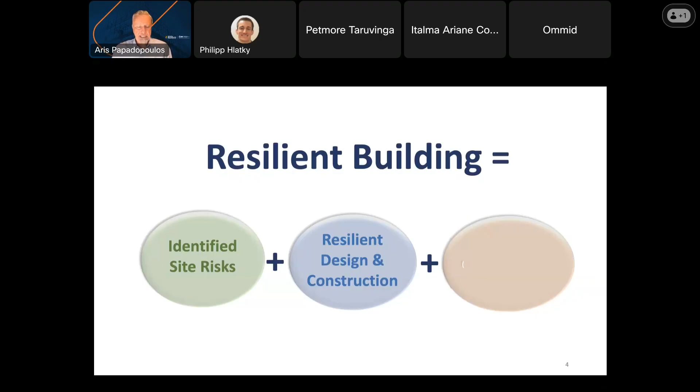What makes a building resilient? A building needs obviously to identify the risks that are applicable for its location. Second, to design and construct the resilient measures that are needed to address those risks. And third, as we know, a building is like a human body, it needs to be properly maintained, so diligent maintenance.

BRI focuses on the first two, the identification of the site risks and the design and construction of the building, rather than the third. But we do ask verifiers when they visit existing buildings to spot check whether there are any signs of deterioration and poor maintenance. And I will highlight some of those later in the presentation.

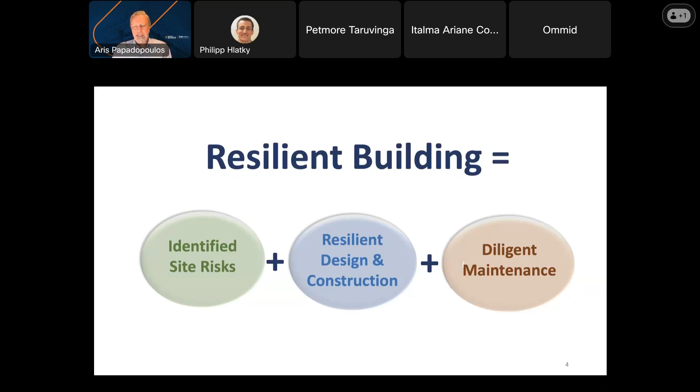So what is BRI in a short sentence here? BRI essentially is a verified self-assessment. The building is assessing itself, but that assessment is verified by two experienced and certified building professionals who are certified by IFC, and you are obviously all candidates for that. So the verification is the quality control for the self-assessment, and it is a rating. It is not a certification.

A rating for any building type. It can be a small building, a house, a large hospital, a school, government building, any type of building, warehouse. BRI is not for infrastructure such as streets, highways, dams, bridges, piers. In an airport, for example, you can rate the buildings, you cannot rate the runway. In a port, you cannot rate the piers, but you can rate the warehouses and the buildings.

And basically what we are rating are the hazard mitigation measures. We are not rating the hazards, we are rating the building's mitigation measures that it has to defend itself from those hazards. So this is a short sentence of what BRI is, and obviously we'll be discussing all the components of that.

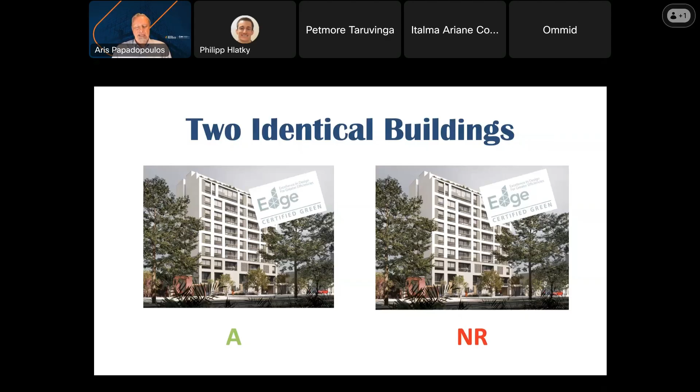I like to put this example up here of two identical buildings. They were identically designed and built, and in fact, they both rated very high on the green certification, a high EDGE rating. But when we looked at them from the BRI perspective, the one on the left turned out to be an A, and the one on the right turned out to be an NR. Two identical buildings. So, how is that possible? The one is an A and the other is an NR. And the answer to that is that we may have identical buildings, but they are in different locations.

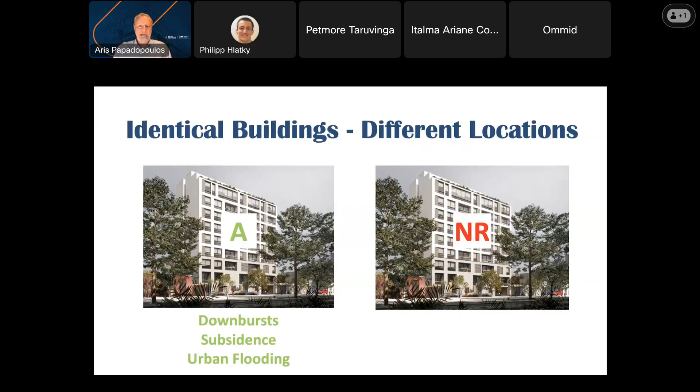The location on the left has relatively mild hazards of downburst, subsidence, and urban flooding that its design and construction has addressed. But if you use that same design and construction for a building that will experience typhoons, earthquakes, and flash flooding, that building will be subject to damage and perhaps destruction.

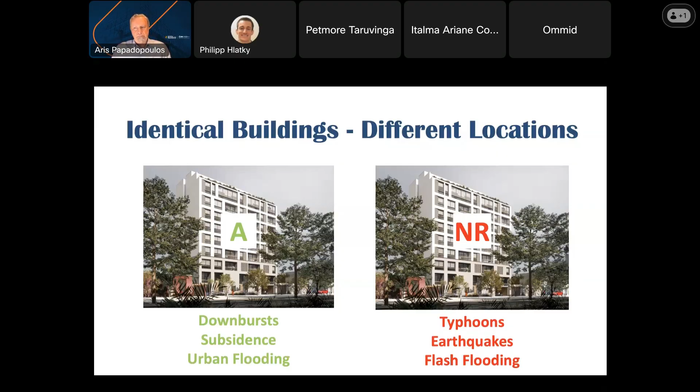So, BRI and resilience is very location specific, and the hazards of the location obviously affect the design and construction of the building, something that is not as pronounced in green ratings. So, that's what complicates resilience ratings to some extent.

So I also like to ask, who is the customer? And most people in the building professions and industry will say, well, the customer is the owner, or the developer, or the people who are leasing the building.

And I like to reply to that, true, but the customer is also nature, and nature is a much more demanding customer. And if nature is not satisfied, then nobody else will in the future be satisfied, because nature will take its toll on the building. So when you're talking to developers and owners and so forth, and they're pleading with you why they can't get a higher rating, keep in mind that your customer is also nature, and we need to satisfy nature, and BRI obviously is focused on that particular goal.

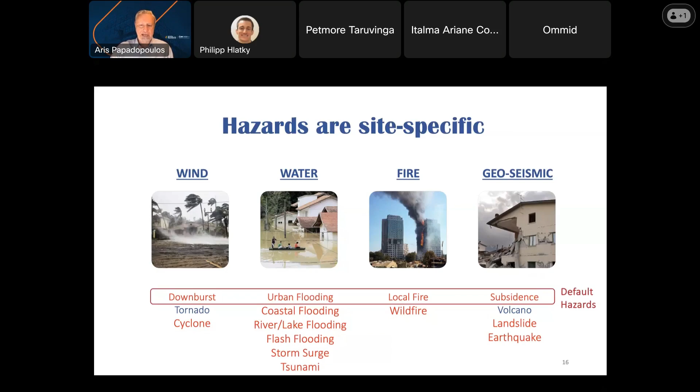So as I was saying, in the third part of the discussion today, our case example is from South Africa. I highlighted in red what I observe being the hazards in various parts of South Africa. As you can see, there are quite a few hazards, as you mentioned earlier. South Africa is affected by many hazards. So, definitely you'll see a lot of these in buildings that you are rating.

So as I mentioned, the BRI can be used for any building, new or existing. In fact, we encourage as much as possible for buildings to assess themselves in the design or even site selection phase. The rating at that point will be a preliminary rating, but it can help them address mitigation measures in a more practical and cost-effective way than after a building is constructed. It costs much more to change a building after it's built than to change the location or the design of the building before it's built.

So for buildings in design or construction, the BRI rating that will be done will be a tentative one, and then a final rating will be given following post-construction verification. So BRI can provide valuable input into the design and even site selection process.

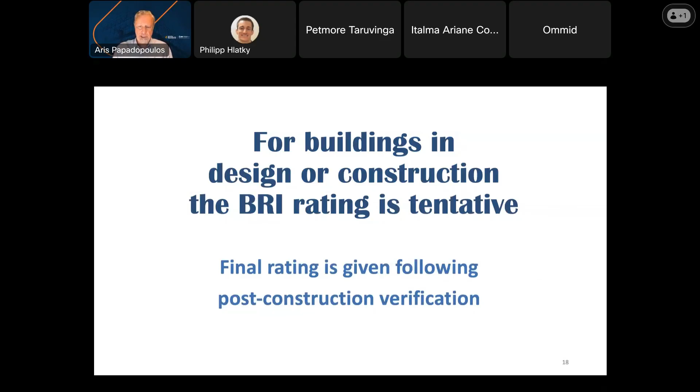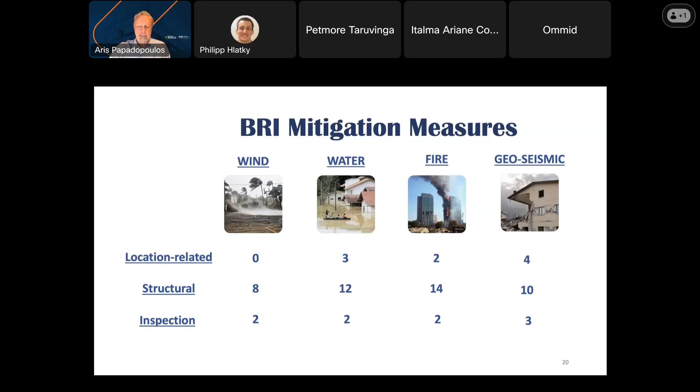So the higher the rating level, the more mitigation measures it needs to satisfy, and the number goes up exponentially, not just linearly. So it's much more demanding to achieve the A and the AA level because the number of measures triples perhaps. So this is an overall summary. There are a little over 60 measures here in total, but as I said, for any particular building, it will be a subset of these.

Now, looking at the measures in relation to the rating levels for cyclone-prone locations, the AA requires a reinforced concrete construction. A can be any material, but rated above 290 kilometers an hour. The B level for cyclone is 200 kilometers an hour, and anything that does not rate above 200 is considered an NR.

This is for non-tsunami locations that are subject to, let's say, flash floods or river or lake flooding. To not be an NR, you need to be at least 3 meters above the local water, whether that's the sea, the river level, a lake, or even the bottom of a dry creek. And obviously those criteria become higher as you go into the A and AA. And for tsunamis, they're even much higher. They're like 5, 10, and 15 for tsunami risk locations.

For fire rating, and this is just a sampling, there are other additional measures obviously in the list, relating to the key elements, there are fire rating criteria for the components. Anything less than half an hour is considered an NR. Above an hour is an A, and above 3 hours is a double A.

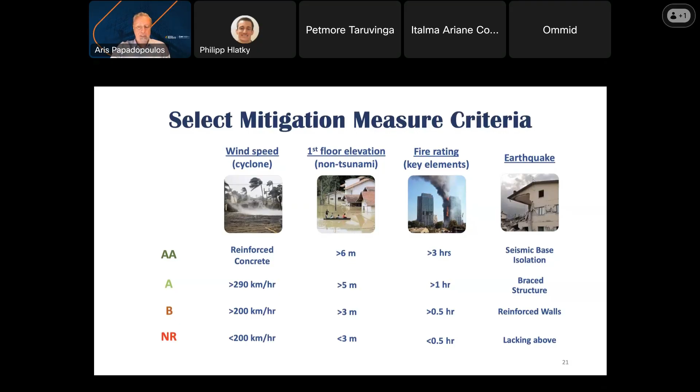And for earthquakes, the global best practice, I mentioned the example of the Turkey hospitals, seismic base isolation is required for buildings of 4 stories and above, having a well-braced structure for an A rating, and having reinforced walls and no soft stories for a B, and lacking the above will put the building in the NR category.

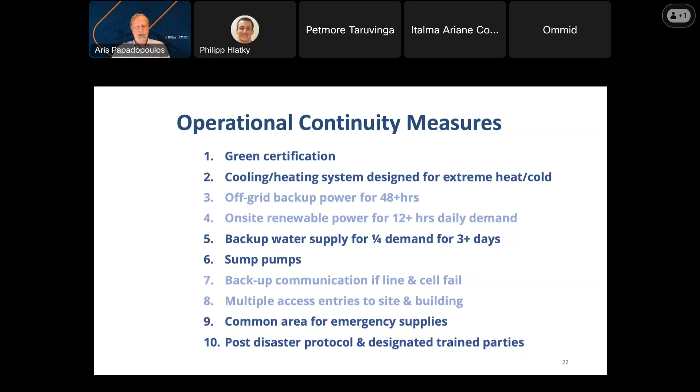So let's move on to the operational continuity measures. There are a list of 10 measures, and all of this is explained in detail in the user guide that you should review, if you haven't already, definitely before the verifier exam. There are also schematics that show you what we're talking about. The list of 10 operational continuity measures includes green certification. If the building has an EDGE rating or equivalent, it satisfies one of those.

If it has on-site renewable power that can satisfy at least 12 hours of daily demand, it satisfies another one. So, and I think BRI is generous at this point, if it meets at least 3 out of these 10 measures for operational continuity, it can add the plus designation to its letter rating. These include backup communication, even having a common area for emergency supplies, and for larger buildings, having a disaster protocol and designated trained parties.

So summarizing BRI's terms, it's free and open source, as we said. The rating itself is valid for 10 years, or earlier if a major event occurs, and I'll explain what a major event is on the next exhibit. So up to 10 years. And as we mentioned before, it is a rating, not a certification, and it needs to be verified by 2 registered building professionals on site.

We do not accept remote verifications. You can't do this from your office and your computer. You have to visit the building as a verifier at least once and walk through the building. And we know as building professionals that seeing is knowing. You need to see the buildings that you're talking about. So these are the basic terms here.

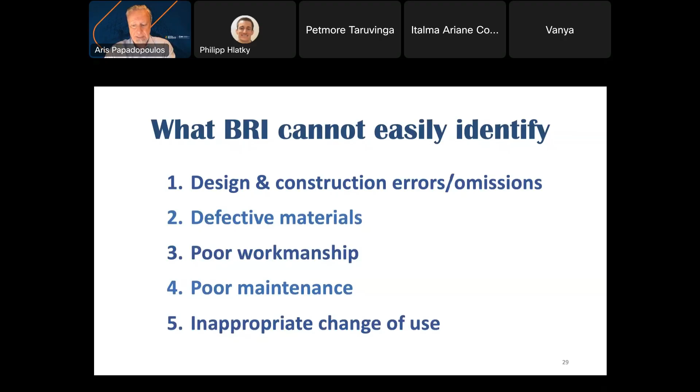The things that BRI cannot easily identify include design and construction errors and omissions. There may be errors in the design of the building, omissions in the construction. These are things that BRI cannot identify, and oftentimes they're only identified after the fact, after damage occurs. BRI cannot identify defective materials, if the materials used did not meet the quality standards they claimed. Poor workmanship in the construction cannot be identified, poor maintenance most of the time cannot be identified, and any inappropriate change of use that is not reported cannot be seen at a later point in time unless it is reported.

So when you visit a site as a verifier, especially looking at an older building, one of the things to look at is subsidence. Is the building tilting in one direction or another? I like to carry with me a small ruler with a level in it, and sometimes when something looks funny to me, I just put the level ruler against the wall or a part of the building and see, is it level? That's a first sign of subsidence.

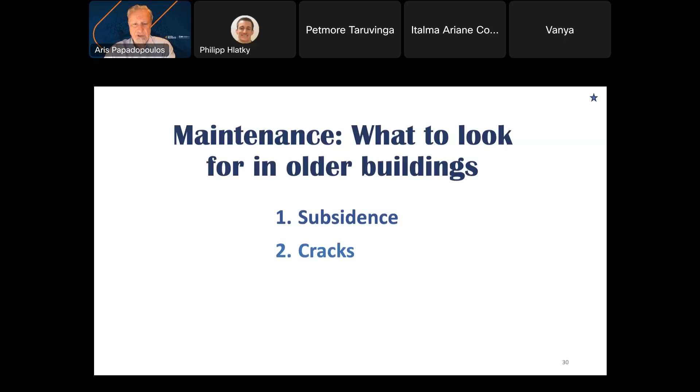Second is cracks in the building, especially older buildings. If you witness severe cracks, corrosion can occur inside those cracks with reinforcement or other corrodible materials. And water stains: if you see visible water stains on the walls, on the ceilings, and parts of the building, that's a telltale sign that water somehow is getting inside the building.

And what we ask the verifiers to do when they see some of those is basically to record them, note them, and even take pictures. And if the verifier considers them serious, they should notify the building representative and say, we see this maintenance issue, deterioration, and so forth, and perhaps this is something the building will need to address before the verification is concluded.

So I would ask the building, okay, what's your plan to correct these? And I'll wait until you correct them before I come back and complete my verification. So this is why a site visit is important. And obviously, we're not looking for a complete inspection of every part of the building. But as you're walking through a building, especially an older one, keep an eye out for any of these signs.

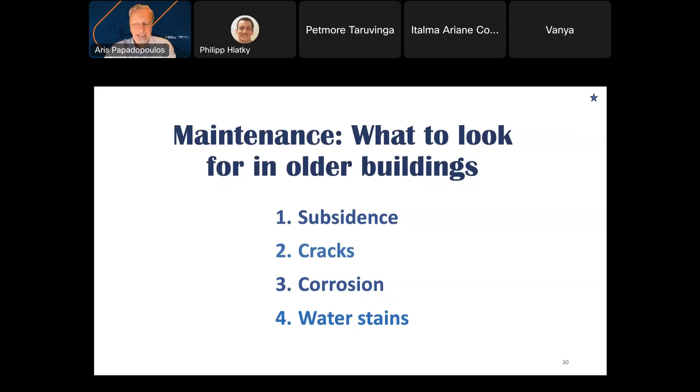Frequently asked questions. BRI users can set a target rating based on building criticality, meaning that BRI doesn't have different requirements for different buildings, but a building that is more critical should be aiming for something higher than a B. A hospital, for example, should not be just satisfied with a B. A house may be satisfied at a B level, but a hospital should be aiming perhaps for an A level, or a critical government building for that matter that will be important during a disaster event.

So the user can set the target rating and say, this building is critical. I need to invest more in mitigation measures to make sure that it survives and is operable. And I need to aim for, therefore, the A rating for this building rather than just the B rating.

And as I mentioned before, BRI's mitigation measures are more performance focused, particularly at the B and A level, than prescriptive. So BRI allows for local solutions that are accepted by the local codes in meeting those performance standards, whether a building has to be elevated a certain height, or resistant to winds, or resistant to fire, etc.

And BRI relies essentially for its rating on the building's mitigation measures rather than public defensive infrastructure outside of the building. For example, there may be a dike or a seawall or something outside of the property that may be at a certain height, and the building may say, look, I have that defense outside my property, and therefore I meet the measure. Well, BRI doesn't work that way.

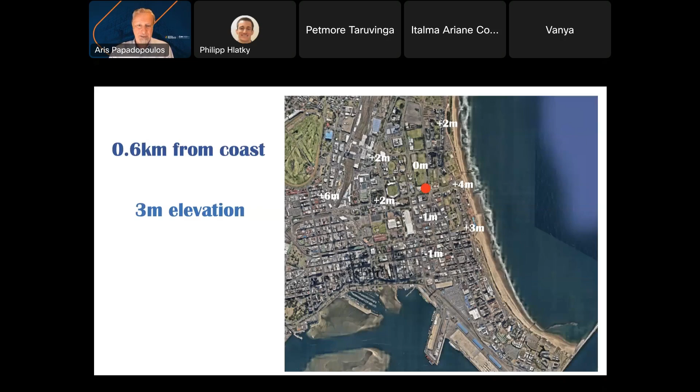And I also look at older maps too. I sometimes pull an old map to see how that area looked 50 years ago or even earlier. And I look at flood histories, reports on floods, and basically I found that that location was a former marshland. Older maps show that, and even today, in recent years, that area floods frequently from storms. So you have storm surge and excessive rainfall in that location, and I even saw pictures of some serious flooding in that part of Durban. So I know that water is an important hazard here.

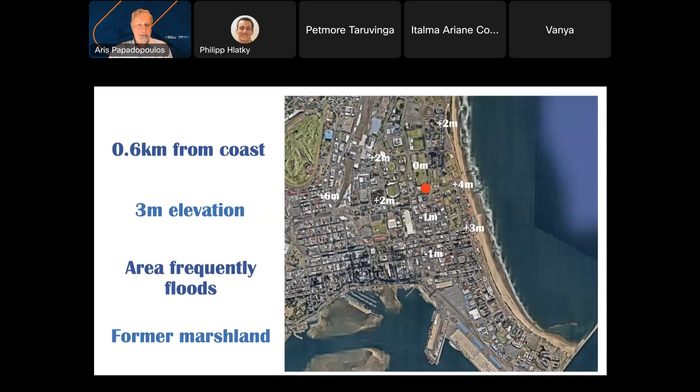I also looked at the tsunami hazard, and I looked here at a map of oceanic seismic activity. Africa is surrounded by that, but the most active areas tend to be on the Indian Ocean side, not the Atlantic side, and there have been some seismic events on the Indian Ocean side in recent decades. So if there is an event, it's probably a 3-4 hour distance for a tsunami wave to reach Durban. So I also picked tsunami as one of the hazards.

So when I looked at the hazards for this location, I said, okay, we have the default hazards. They always apply to every location, but flash flooding should be considered, and tsunami should also be considered. That location didn't seem to be very earthquake prone. And it was also further south from the cyclone prone areas. In Mozambique, for example, we found that the coastline is prone to cyclones, but Durban seemed to be much further away from the cyclone prone area.

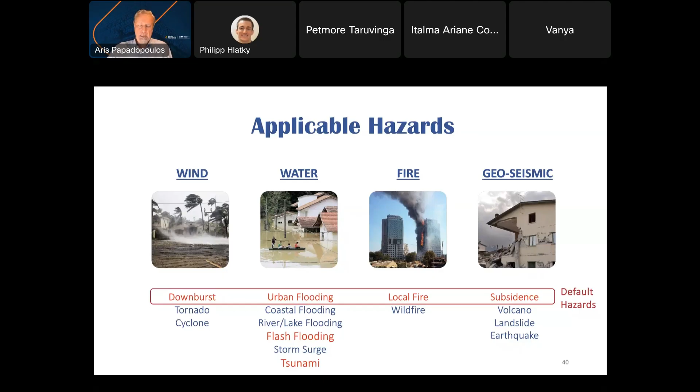So I identified those as being the applicable hazards for the location. And then I was looking for, what is the key building information that I need to verify here, because I'm looking at the downburst, let's say, as being the dominant wind hazard.

And the question I had, okay, the structure appeared to be reinforced concrete. That should satisfy even a much higher rating than a B. But are the windows rated for at least 160 kilometers an hour? So that's a question I would need to verify as a verifier.

The building itself seems to have a lobby level, and then the occupied floors start above that, and there's at least 5, maybe 6 meters. So that first floor elevation is met. But given that this is a tsunami-prone location, I'm interested also where the mechanical electrical equipment is. And to be a B, that mechanical electrical equipment needs to be at an elevation of 5 meters. The ground is 3 meters, so it needs to be at least 2 meters above the ground.

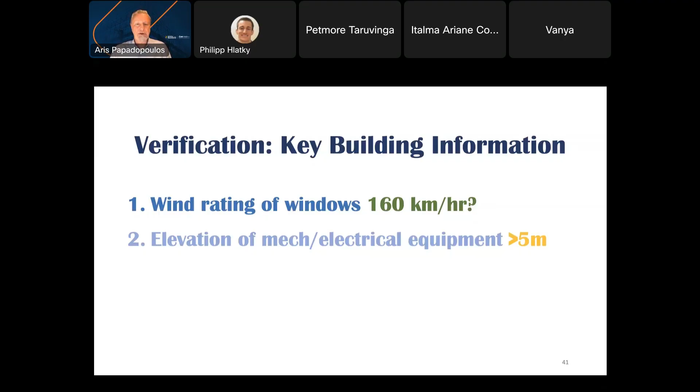So I would need to check if I don't receive the information. I may receive some information before, but when I visit the site, I need to check the mechanical electrical equipment. Where is it? If it's on the roof, that's great. If it's on the ground floor, is it elevated? And how much?

Then I would need to check the fire rating of the emergency doors. And by the way, the green is for the A rating. The kind of yellowish here is for the B rating. So if this building hoped to be an A rating, it would have to be at least a 2-hour rating for the emergency doors.

And if it aims to be an A rating rather than a B, it would need to have a sprinkler system. I didn't see sprinklers. They weren't evident from the photographs I had. So I need to verify whether there's a sprinkler system.

And if there is a sprinkler system, what is the capacity of that system in liters per hour per square meter of the building? And BRI has a criteria for that. So is it over that or below that? So that's some of the key building information that I would be needing to verify as a verifier to determine.

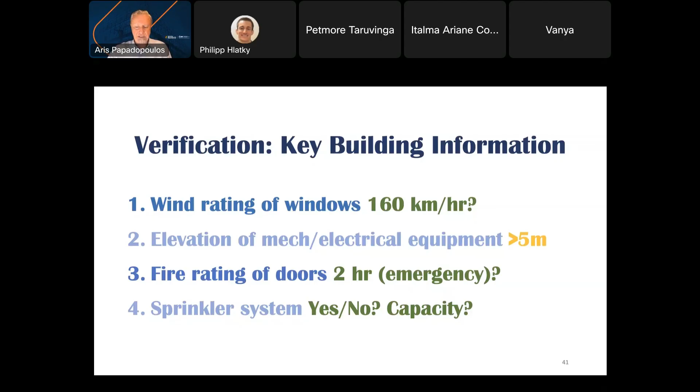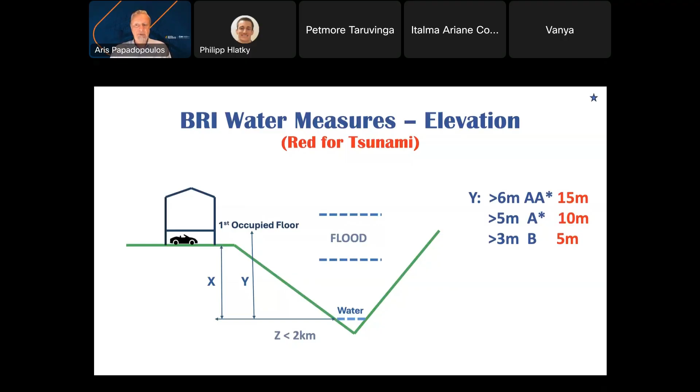So for the AA rating, and the red is for tsunami, the level of Y, which is the first occupied floor, has to be 6 meters. For A has to be 5 meters, and for B 3 meters, and that is even higher for tsunami. And this hotel we've identified faces potential tsunami risk. So for the B level, the first occupied floor has to be at 5 meters, but also mechanical, electrical equipment have to be at the same.

And another criteria here is that if the location is low in elevation, the water has to be able to flow through the bottom part of the structure, in that space where you see that little car there. If it's below 5 meters for that X, we want the water to be able to flow in and out where it floods. Because if the water builds up around the building, it will start acting like a boat and will try to lift itself. And that can potentially damage the foundation and damage the building itself.

So if it is in a flood prone location where the ground is lower than the level required for the rating, even if the first occupied floor is higher, that lower level, we want it to be open to water coming in and out. And that can be achieved either through open walls or through closed walls with flood vents that open automatically when hydrostatic pressure builds up. And if it's urban flooding only, all this is just at the 3 meters level for the A.

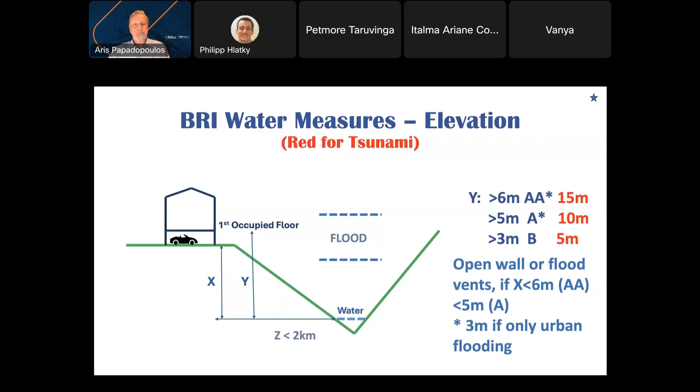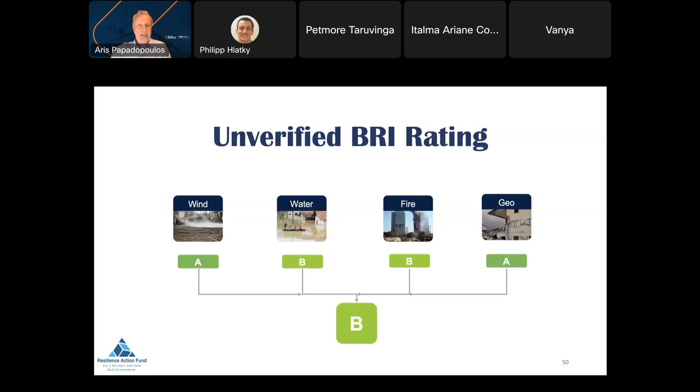So my initial, and this is unverified, my initial view of this building in this location is that for geoseismic and wind, it is probably an A, subject to verification. And in water and in fire, it is probably a B. The biggest question mark I have is in the water regarding the elevation of mechanical electrical equipment, whether it can satisfy that 5-meter elevation. So on an unverified level, my preliminary assessment is that this building is a B.